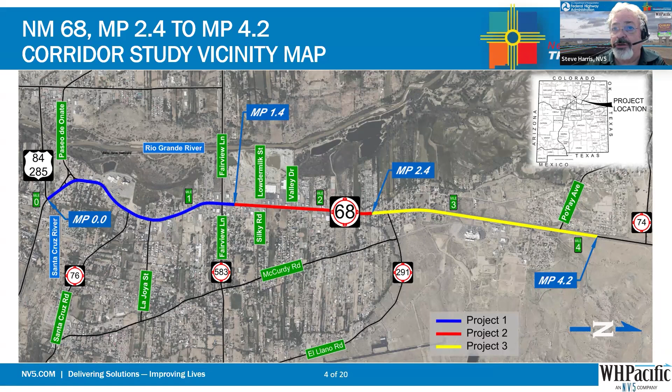Because of the size and cost of the project, the corridor was divided into 3 separate projects following the study phase for design and construction. The presentation will focus on the northern project, which is shown in yellow and which is now in final design and currently scheduled for construction in 2026 or 27. And again, the 3 different colors show the approximate limits of the 3 different projects that are being designed. The southern project, shown in blue, is also currently in design at about 60% complete.

The northern project, which I've also kept with the yellow color, begins at the 2.4 milepost and ends at 4.2, and it will include full reconstruction. The design also includes buffered on-street bike lanes and sidewalk south of Lower Ranchito Road, separate multi-use trails for bikes and pedestrians from Lower Ranchito to Po'Pay Avenue, new traffic signals and geometric improvements at New Mexico 291 and Eagle Drive, and a roundabout improvement at the Po'Pay Avenue intersection, which is the main entrance to the Ohkay Owingeh Pueblo community and business complexes.

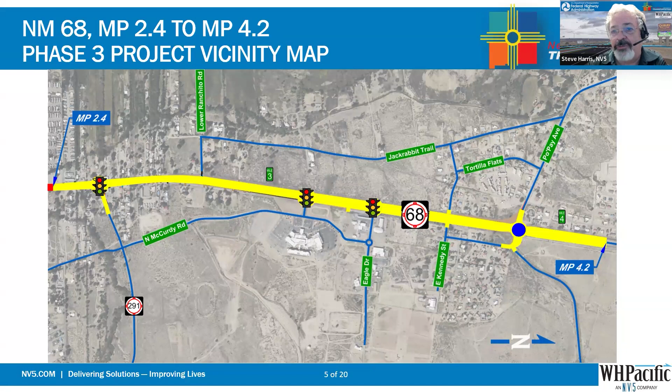Geometric updates and safety improvements at the Ohkay Casino Drive entrance to the casino, and street lighting from the beginning of the project at the south end, which starts inside the city limits, basically south of New Mexico 291, and that lighting extends all the way up to and through the Po'Pay roundabout near the northern end of the project. At that point, the job will convert back to a rural section to match the jobs that have been recently constructed north of the project.

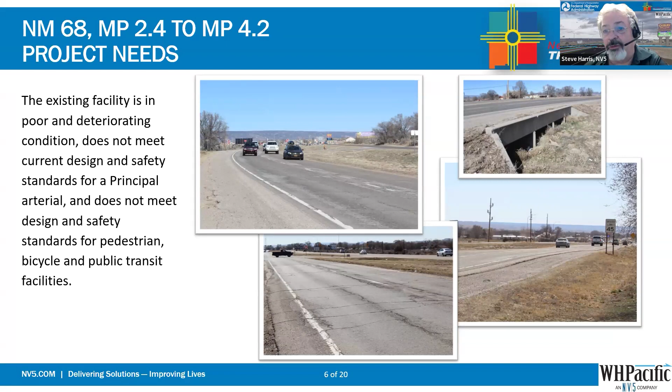The location study procedure refers to the term purpose and need to explain why the NMDOT is undertaking the proposed actions and what its objectives are. Purpose and need provides a basis for developing the performance measures for evaluation of alternatives. That part of the process has been completed, but the needs for the New Mexico 68 project beginning at the 2.4 milepost and ending at the 4.2 are that the facility is in extremely poor condition and is deteriorating, in need of full reconstruction. It does not meet current design or safety standards for a principal arterial, and it does not meet design or safety standards for multimodal users, which basically is referring to pedestrians, bicycles, and transit.

The purpose for the project, which will sound somewhat similar, again with the same beginning and ending point, 2.4 to 4.2 milepost: it will correct physical deficiencies in the roadway infrastructure. It'll improve safety, reducing speeds and incorporating other traffic calming measures and improving nighttime visibility. And it will provide a continuous and accessible multimodal facility for bicycles and pedestrians.

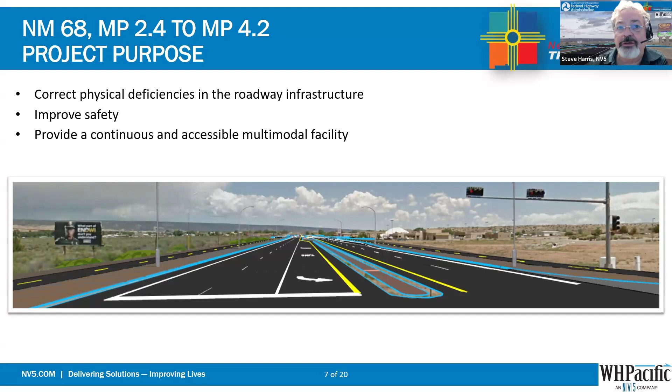This slide summarizes some of the key areas that were discussed during the public and stakeholder involvement meetings that preceded this meeting. They were identified during the study, also in the study report that was created for the project. The information was used to rank and evaluate the different design concepts that were developed. For clarity, we've grouped them into 7 categories on this slide: safety, access, multimodal, traffic signals, drainage, cultural and environmental awareness, and right-of-way concerns and coordination.

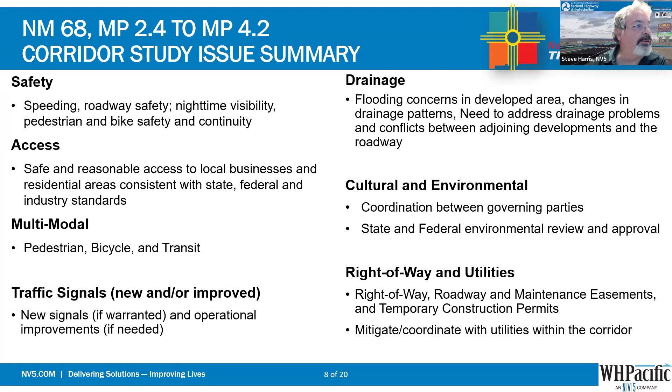I'll now turn the presentation over to Chris Bonanno to discuss access control. Thank you, Steve. Good evening, everyone.

As we've discussed in previous meetings, access to NMDOT roadways is controlled by the State Access Management Manual. This document states that property owners abutting a public road have a right of reasonable access, but that the right of access is subject to regulation for the purpose of protecting the health, safety, and welfare of the traveling public. With that in mind, our goals for the project were to clearly define the access points by establishing standardized and better defined curb cuts or curb returns, reduce the hazards associated with uncontrolled left turns by maintaining or implementing raised median access control at and between the major intersections, and where alternative access is not available and safety constraints allow, construct what we call a two-way continuous left turn lane.

So the image you can see there on the left shows an area of the existing corridor where there's a poor definition of the existing access points and a heavy concentration of driveways. It's just hard to tell where people can come onto the road or where they can go off.

The image on the right shows the planned improvements, which include new driveways, new curb and gutter, which we've shown in blue to make it a little bit easier for you to see, better definition and control at the intersections, new raised medians, and that two-way left turn lane that I mentioned.

I'll now turn the presentation back to Steve Harris to continue on. Thank you, Chris.

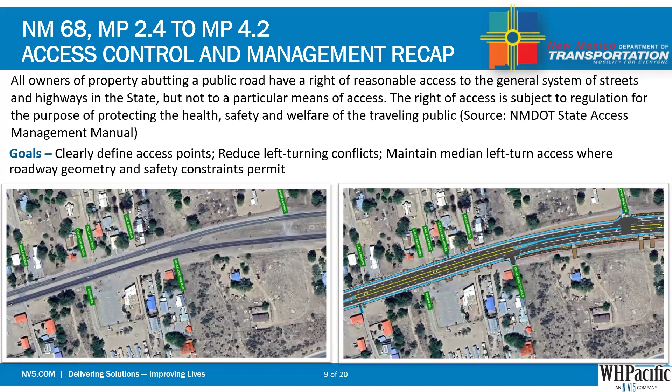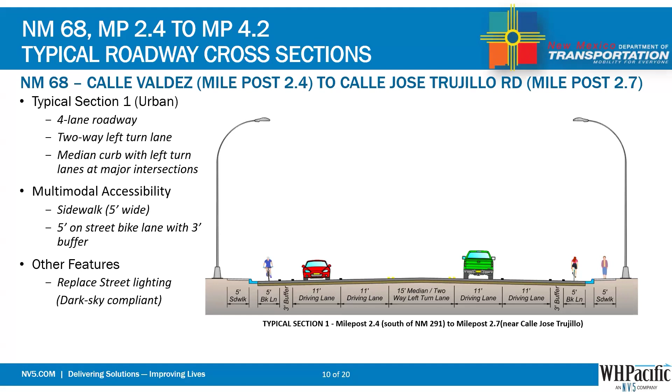Part of the typical section is already an urban section, but it will be entirely an urban section. So it will have curb and gutter, and then the sidewalk behind the curb and gutter. And then of course the street lighting that will begin at the south end of the job and extend all the way up north to the Po'Pay roundabout.

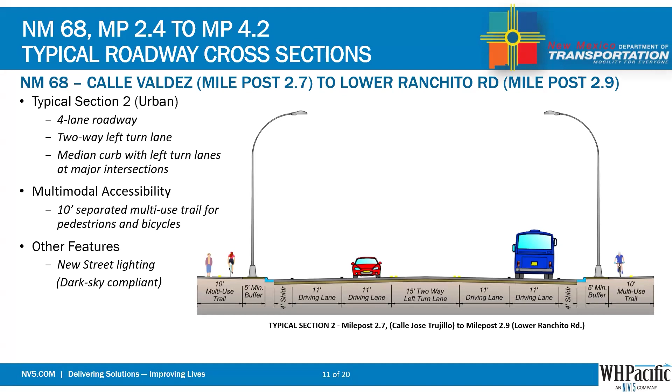The third typical section begins at Lower Ranchitos and continues north to the Po'Pay Avenue roundabout. And from this point forward, there is a raised median island. The old median was 75 feet wide. The new median will be 20 feet wide, but there will be this raised island with, we anticipate, colored patterned concrete in the center.

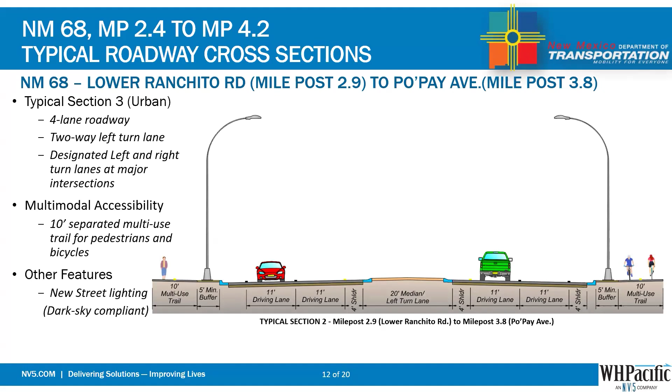And again, the bike lanes or the multi-use trail is on the outside of the roadway. Again, the street lighting continues down the corridor through the urban section here. And that's pretty much the elements of this. Again, it has 11-foot driving lanes on this particular section of the roadway. Next slide.

Once you pass through the Po'Pay roundabout, the typical section will return to the rural section, which pretty much mirrors the median and the driving lanes that are out there today. However, it'll still be fully reconstructed because of the condition of the roadway. The median in this area has some variable dimensions, but it's still approximately about 75 feet wide.

The existing shoulders are inconsistent in width, anywhere from 1 foot to 3 feet on the inside, on the median sides, and on the outside it can be anywhere from I think 6 to 8 feet. In the new typical section, the shoulders on the outside will be 10-foot shoulders, and the shoulders on the inside or the median side of the roadway will be 4-foot shoulders. That's consistent and matches the projects that are currently under construction north of this project.

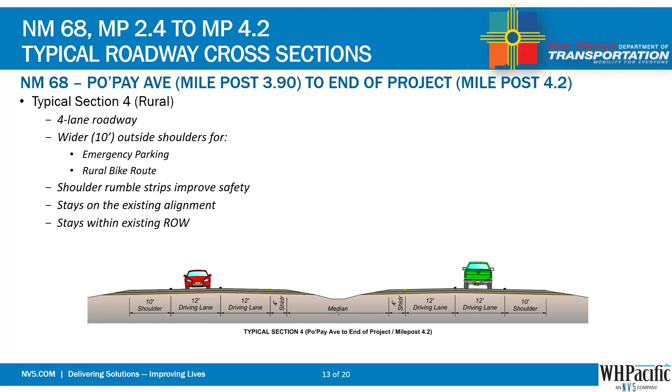Basically, this is a fairly short section. It ends about 650 feet north of Po'Pay.

Next slide. The next handful of slides will all be the primary intersections along the job. The design for New Mexico 291 includes geometric improvements and a traffic signal at the intersection. The advantages to that are it expands the right turn curb radii and accommodates larger vehicles. It has a dedicated left and right turn lane on the westbound lanes of 291.

It has protected pedestrian crossings and ADA compliant curb ramps that will improve safety and accessibility. ADA refers to Americans with Disabilities requirements, and basically those are slopes and surface requirements that make it more accessible for people that have disabilities or have limited mobility, so that they can easily cross roads and navigate down those roads as pedestrians.

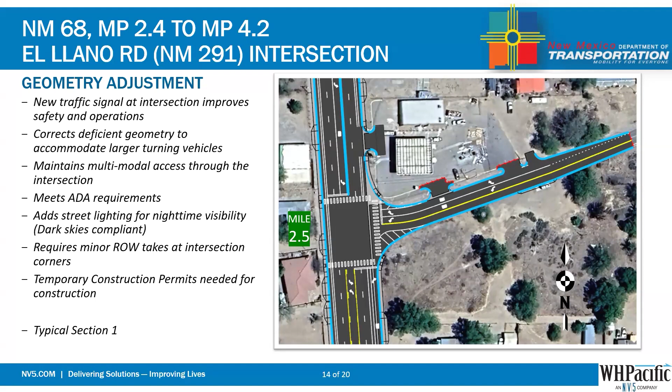The intersection at the Ohkay Owingeh Casino will be reconstructed to match the new roadway typical section 3 that we showed a few slides back, with the raised median and the 20-foot wide median. The improvements will include better line of sight for left turning vehicles along New Mexico 68. It will provide a pedestrian crossing on the north side of the intersection to satisfy access to the multi-use trail on both sides, and also any foot traffic that will need to pass from the east to the west side of the roadway in a safe manner. It will also include the safety enhancements that are associated with the main line.

It'll include street lighting. It's designed for nighttime visibility, but it's also designed to include what we call dark skies, which is technology that reduces what some people refer to as night or light pollution. It basically prevents the light from scattering and wandering far away from the road. It pretty much keeps the light focused directly on traffic right around the road and the people that are right around the road. Next slide.

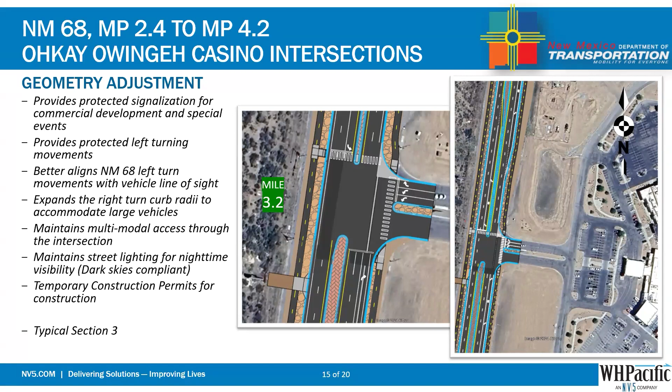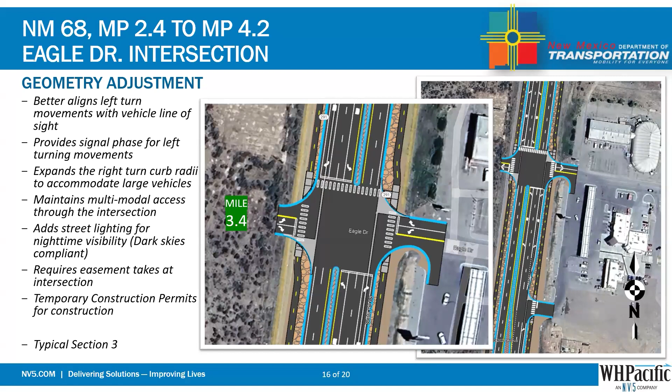There was also a new signal going in at Eagle Drive, and it'll be constructed to match the roadway typical section again. The improvements include better sight distance for the left turning vehicles, pedestrian crossings to improve pedestrian access and safety, and street lighting for the nighttime visibility. And again, this has crosswalks, both north-south crosswalks and also one east-west crosswalk to accommodate anybody wanting to get from one side of the roadway to the other.

Then we continue north to the Ohkay Owingeh entrance, which is also referred to as Po'Pay Avenue. At Po'Pay Avenue, we're putting in a roundabout in the design. This was selected because there has been a high frequency of accidents and injuries in this area, and there have been issues with the high-speed transition from the rural section not being effective without something to dampen or reduce the speed of vehicles approaching. The roundabout will achieve that.

It'll reduce serious injuries and fatal crashes in the area. It should reduce the side street delays that currently exist coming out of the Pueblo and entering the Pueblo. It'll provide a visible transition point between the urban and rural highway sections, consistent with the need for slower speeds in the urban area. It'll improve traffic flow and create less congestion on the approaching roads, and maintain safe multimodal pedestrian and bicycle access through the intersection. Again, this will be well lit so that the pedestrian crossings are visible not only during the day but at night.

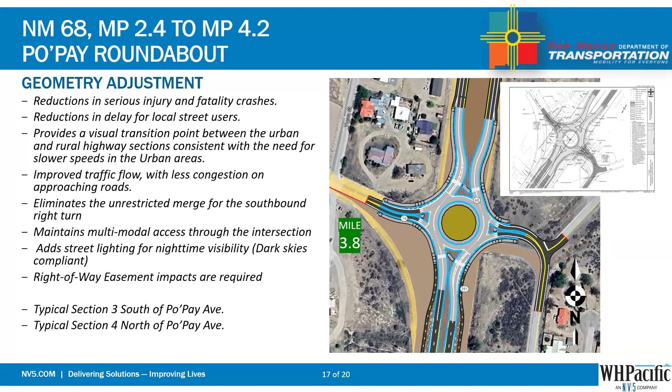It does have some minor right-of-way and easement impacts associated with the intersection. We're working in coordination with the tribal government to identify those and modify the right-of-way accordingly. On the northbound approach, if you're south of the roundabout traveling north, the typical section is typical section number 3 that shows the raised median. And if you are southbound, just north of the roundabout traveling towards Espanola, the typical section is typical section number 4.

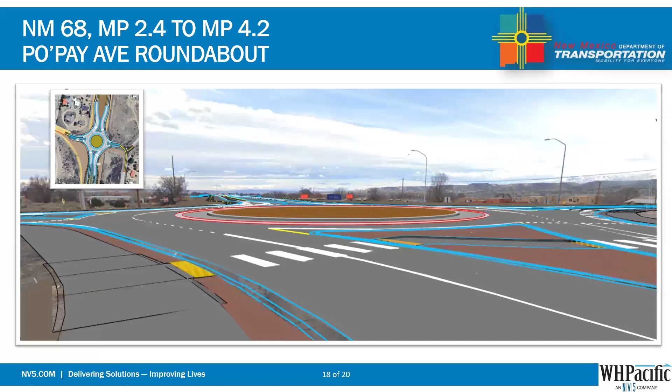I've also added in a graphical 3D slide that shows what the roundabout looks like after it goes in place. We have not worked up the details for the island treatment, but there will be some sort of vertical element in the circular area in the middle that drivers approaching it will see, and it should help them navigate through the roundabout. It's a pretty standard feature for roundabouts, but this shows you at least how it's laid out and what it looks like on the ground out there.

I think I need to turn the presentation over to Teresa at this point so she can discuss environmental compliance. You can take it, Teresa. Yeah, I thought this was your slide, Laura. Yes, it is. Okay, there you go.

So we have completed the cultural resources field surveys, and the results of those field surveys indicated that there aren't any adverse effects on cultural or historic resources that are anticipated from this project. Same with biological resources. We have conducted those field surveys, and the results have indicated that there will not be significant impacts on biological resources from this project.